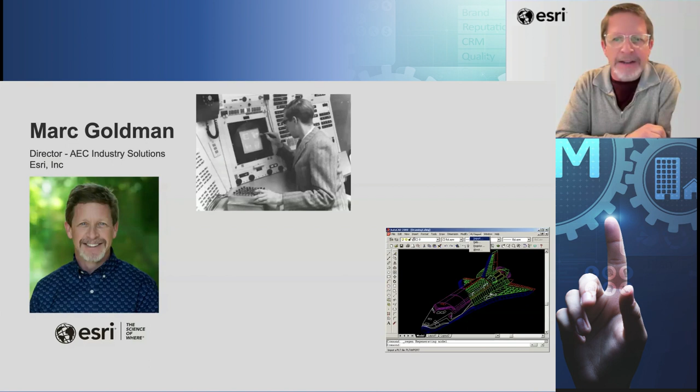I got involved in the world of CAD actually quite a while before that application that just popped up. That was AutoCAD 2000. I got involved in AutoCAD in the late 80s, early 90s. Really didn't touch on GIS until rather recently. I worked at Autodesk twice, once in the days of AutoCAD and once in the era of Revit and many, many applications. And these days, my world involves the intersection of GIS and AEC technology, certainly involving BIM and scheduling content and project management and environmental management types of solutions.

And that image that just popped up is an application called ArcGIS GeoBIM, which I'll show some applications of later, a little bit here just before we jump into all the content.

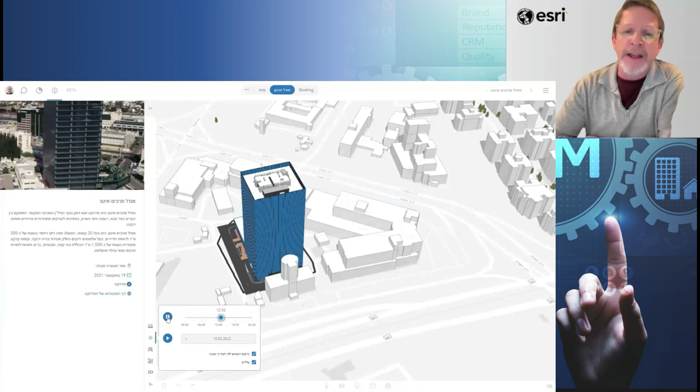This example is one I received from our partners in Israel. Actually, if you're able to read the Hebrew on the right side, let me know. This is a project in Tel Aviv where BIM content got inserted into the GIS view to understand, at various times of day, light studies, shadow studies, and traffic patterns. Once the project actually got built, it then got scanned using drone flights to capture the conditions of the building itself, as well as existing conditions around it through aerial imagery, helping urban planning, urban design, context awareness, visualization, and various other levels of understanding through this combination of 3D BIM and 3D GIS.

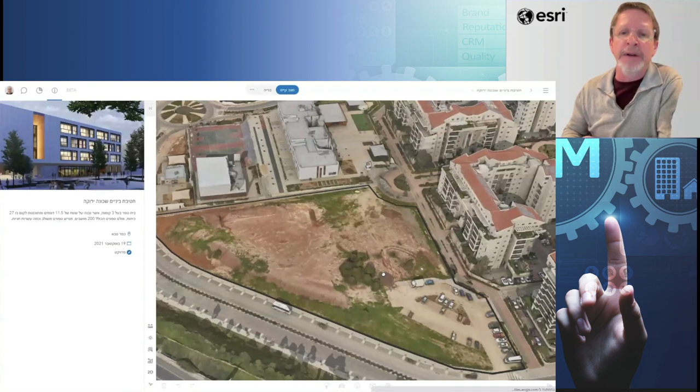In the realm of environmental consulting, GIS is a critical solution, data set, and analysis tool to improve project efficiency and accuracy, to make better decisions as it pertains to the biology, ecology, and sustainability of our built world. This is an interesting project, now a couple years old.

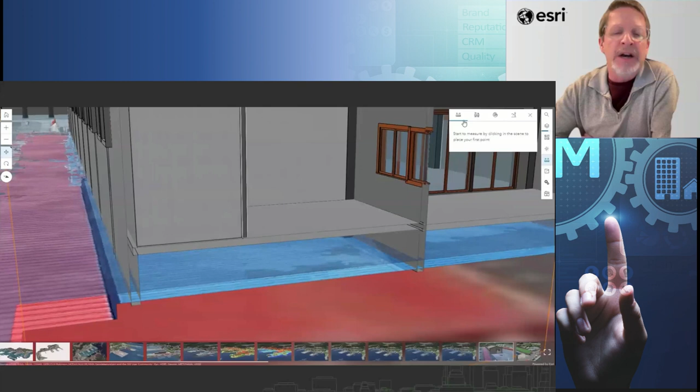We helped our Taiwanese partners schedule and plan a drone flight using some Esri technology. You can see the point cloud of this port environment pop up, some BIM content on the pier itself, and then by changing the sea level rise conditions from 1 meter to 5 meters to 10 meters, we can see what the architectural impact is. So building this building on top of the pier with enough, about 3.5 extra feet, allows for the sea level rise we know is going to occur, and yet this building does not get negatively impacted.

Engineering and consulting in GIS is, in some ways, the bread and butter of Esri over many years, using our tools to provide geospatial context, different layers of data, traffic flow, weather patterns, the location of competition or partners you might want to know about, and the understanding of both above ground and below ground, to improve the decision-making that engineering and consulting firms take on.

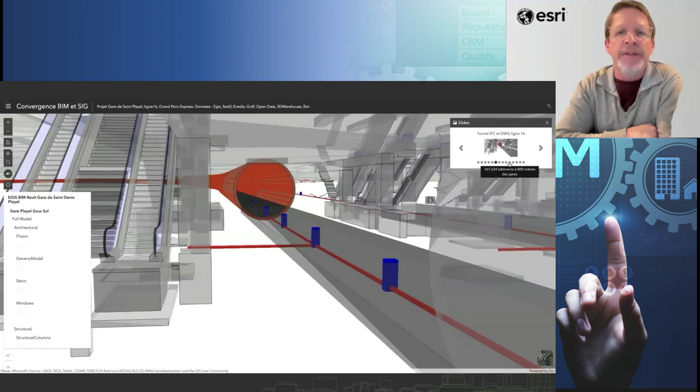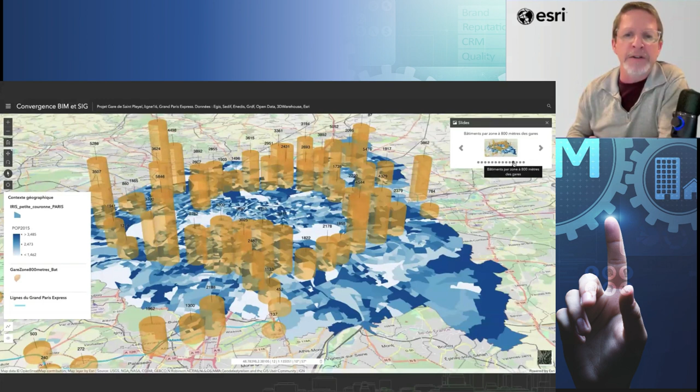Another interesting project, this one in Paris. I believe this was... I forget which firm, it'll come to me in the middle of the night. But they were tasked with defining and identifying the best location for additional metro stations in Paris based on the usage of existing transit. In this case, it was a Revit file dropped into the Parisian fabric at the proper location, based on where the population centers were and how the metro system was used. This combination of 3D BIM and 3D GIS, including demographics information, transit usage, and population density, provided better answers to the engineers who needed to make those kinds of decisions.

And finally, construction management. This is an area that, when I joined Esri, I thought would be sort of the sleeper of the project workflow. Why would you need GIS during construction management? But it turns out it's one of our hottest, richest areas of customer value. When you combine GIS, which is all about location information and context, and not just the where but often the when - GIS is very time-based - when you're able to combine GIS with cost, time, and safety, you're reducing the risks associated with those.

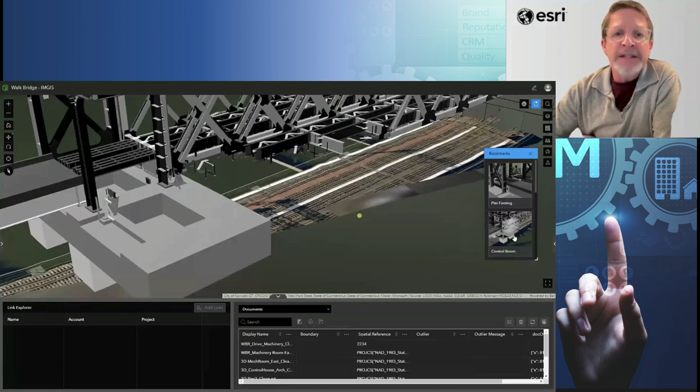And those are sort of the three pillars of construction management: saving time, saving costs, and creating safer environments. So I've got a few examples here that I love to show. This is HNTB replacing this old lift bridge in Norwalk, Connecticut. They brought in a combination of Revit and Bentley content into a GIS environment.

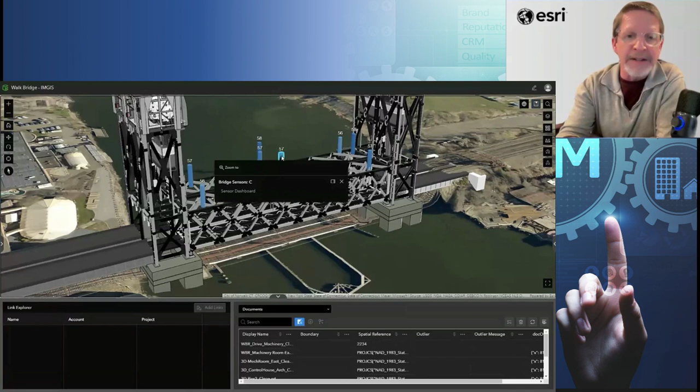And as the pile driving is occurring, the environmental conditions, the seismic activity of the ground itself is being reported in this dashboard view, combining 3D and imagery and IoT sensors, helping the construction team know when to stop the pile driving because they are potentially creating risk of an old asset that still is critical.

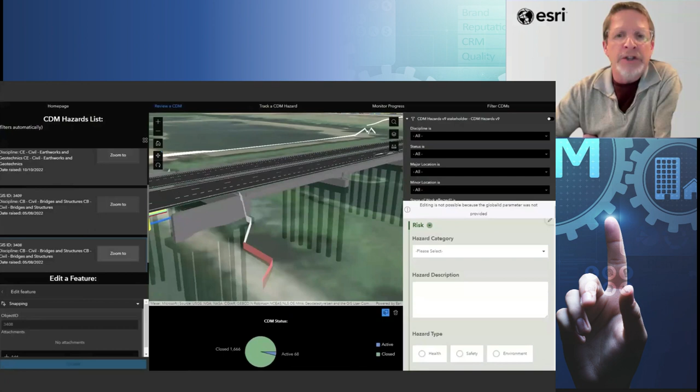Another project, this comes from across the pond. Our friends at Skanska UK infrastructure team built out a mobile app using one of Esri's tools called Survey123 that allows the construction and design teams to collaborate, understand existing conditions in the field. Every one of those little red markers in that map indicates a report that was generated showing where perhaps a safety issue existed or standing water or something underground that needed to be considered.

They go out in the field, they collect the data, they come back in front of the computer in the office or virtually across multiple offices and review these construction design management hazards in this combination of 3D GIS above ground and below ground with field data collection.

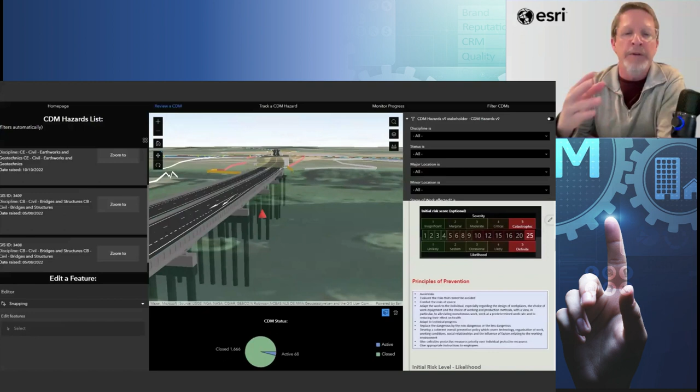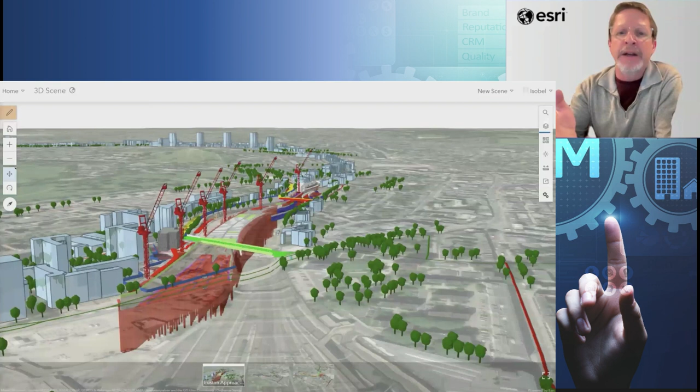Another project from Skanska, also in the UK. This was an interesting project that, again, combined many forms of information. 3D in the form of BIM, 3D in the form of OpenStreetMap data, the actual tree locations placed on a 3D terrain, and then they used this application combined with other apps to understand the progress of construction.

So again, their construction project management team would know the status of piles that were being drilled and eventually placed and then eventually QA'd in this dashboard-like view, rather than doing paper-based statusing or simply having a schedule that was always out of date. They had a real-time view of the status in a way that anyone could understand. You don't need to be a construction project manager capable of reading a work breakdown structure in a CPM-based schedule. This is just a simple dashboard.

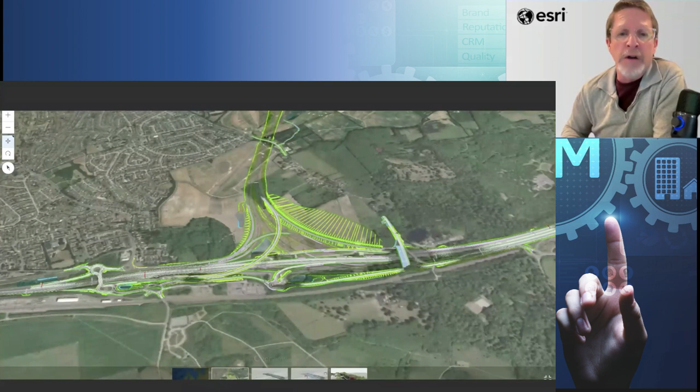And one last one from Skanska, because I think this is really interesting. They bid on a project. They got all the drawings. They modeled them in BIM. They brought them into GIS, put together their proposal, and with about 3 weeks before final decision, they received another bid packet without a clear indication of what the changes were from the initial set of drawings and models to the next one.

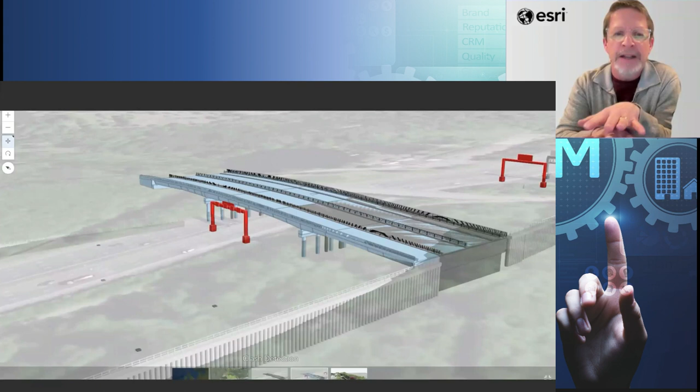They brought it together in GIS, and what you should see pop up on the screen here is these two different overlapping views and these gantries located in new locations. So by means of using GIS and the location-centric approach, they were able to understand the changes between the initial bid packet and the one that they had to submit an estimate on in a matter of 3 weeks. These were point clouds and models and GIS and satellite imagery all brought together.

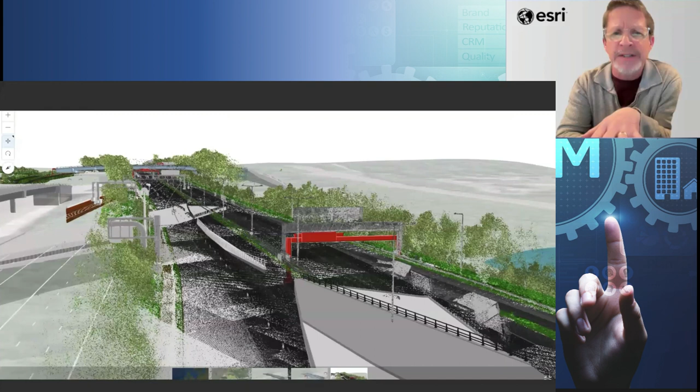And it's one of those success stories where GIS and BIM and all these tech brought together for bid stage led to Skanska winning this project about 6 months ago, and I believe that they're moving forward with construction.

So again, GIS for architecture and urban design provide these great capabilities we talked about. Environmental consulting helps save water, energy, and materials because of location. Around engineering, it's about decision making, improving the planning and engineering processes, and finally, construction management. So many benefits, not enough time to go into all of them right now.

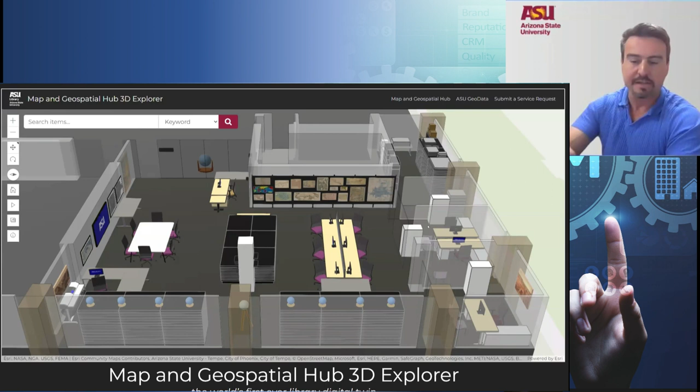So I'm going to transport you all virtually to Tempe, Arizona, a beautiful suburb of the Phoenix metropolitan region, where one of Arizona State University's multiple campuses is located. It's sort of the de facto main campus, Tempe, Arizona here. And this building over here to the right is a section of Hayden Library. And here's another shot of Hayden.

So my unit that I oversee is called the Map and Geospatial Hub, as I just mentioned. And it's really just the traditional map library, as one would expect. We have tens of thousands of physical, analog, hard copy paper maps that we're actively digitizing. So one part traditional map library and another part modern GIS center. And this project here that we call the 3D Explorer really embodies the epitome of that marriage between a traditional library map collection and a modern GIS center.

This is what it looks like when you visit the Map and Geospatial Hub. This is the outside of our suite. We're located here on the 3rd floor of that building, Hayden Library, and this is how we've modeled it with a variety of tools. I'll show you multiple views of our indoor model for our indoor suite, and as we tour more of this indoor space virtually, you'll note that the primary objects that we modeled are really very simple.

They're really these rectangular prisms that are used to represent our flat file map cabinets, which, as I mentioned earlier, store tens of thousands of maps. We used to have approximately 150,000 maps, and partly because of the data that underpins this application, we have done some healthy weeding, as they say in the library world, or de-accessioning of maps. And we currently have about 80,000 physical cartographic resources, including physical historic aerial photos.

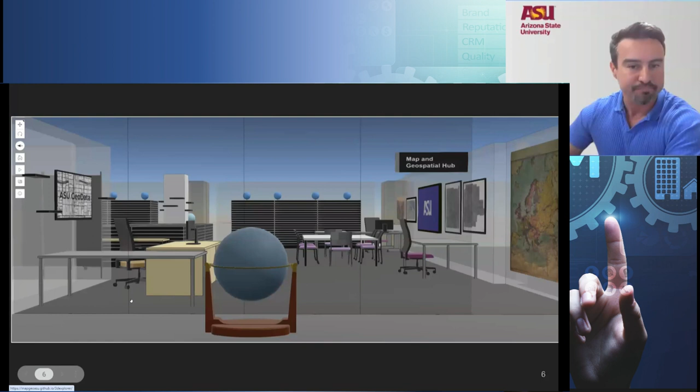So let me show, excuse me, didn't mean to click that. Yeah, that's a hyperlinked image. Sorry about that.

So here, forgive the bad photography. My staff had bad lighting that day, but here's another view of that indoor suite. And here's how we've modeled it again in our Map and Geospatial Hub 3D Explorer application. So as you can see, we've really focused on a lot of the details. We are an academic map library, so a lot of the ambience of our room actually consists of map decor itself. So we wanted to ensure that we textured some of those simple map objects to lend a vicarious feel for what it's like visiting our actual space.

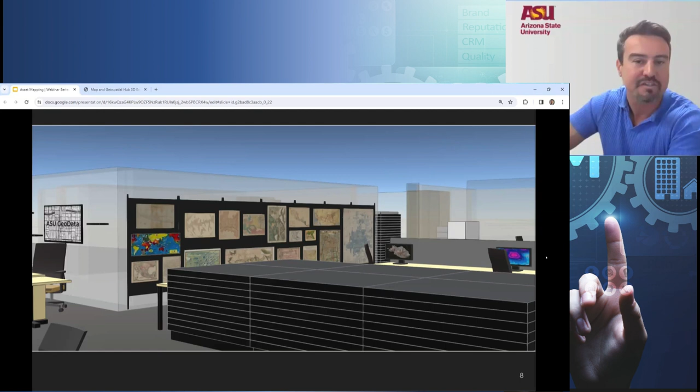Again, forgive the bad lighting. They chose to photograph on a bad day, but you get the gist of what this room actually feels like in the real world. And here's it represented in the 3D model.

So forgive me, I should have had smooth GIFs. I hope this video loads. Live demos are risky, but live videos are also risky. Just wanted to zoom in.

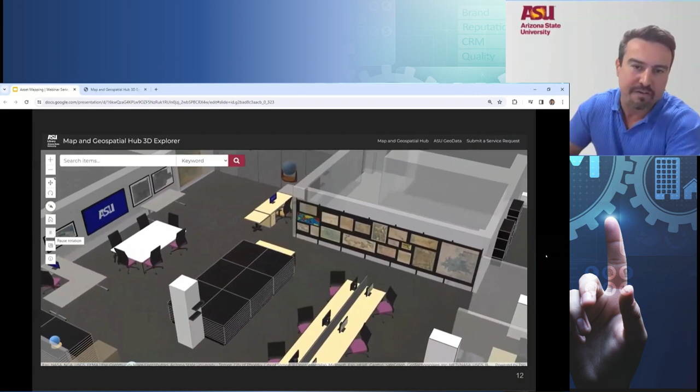So we just flew into this Esri ArcGIS Online 3D map scene, and that showed the interior, or we sort of flew into the room. And I just wanted to give another representation of what this three-dimensional model looks like when you visit. This is a live web application that all of you can visit, and I hope you all do. And forgive me that I chopped up these videos into multiple video sections.

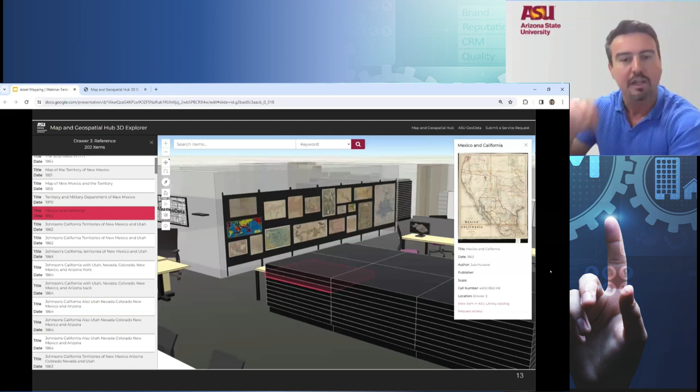But let me tell you, what's the gist? What's the main purpose of this so-called digital twin? Well, first and foremost, it's a resource locator, which, as I'm sure many of you can imagine, even colleagues from the local government sector, just identifying assets and locating assets is important work, right? Especially if you have large asset inventories to manage. And in the library sector, that's the essence of what we do. So the beauty of this is that we have unparalleled locational specificity. We can locate the individual map items down to their individual drawer or shelf locations.

You can also, of course, perform text searches, and obviously with sort of traditional GIS functionality, you can identify all the locations, and the app, when you visit it live, will dynamically highlight all of the locations where the assets that meet your search criteria are located. And if you want to zoom in or identify one or more of those specific assets, like we're doing right now with this aerial photograph, it will show you exactly where it is, and of course provide metadata in the pop-up box.

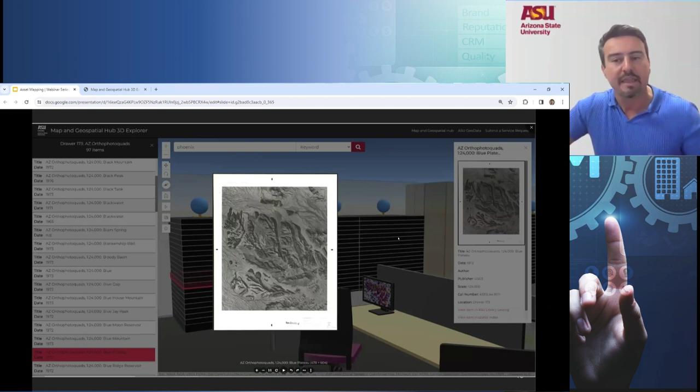The main descriptive information about that asset: our users, which are really higher education library users but also public library users, can get that critical descriptive information about the asset in question.

I'm pleased to report that our entire inventory, as I mentioned earlier, approximately 80,000 cartographic assets, has been fully uploaded, but I regret to report that we haven't digitized everything, right? So, libraries and institutions all over the world are facing this digital transformation challenge, but we are steadily making huge progress. But the goal, of course, is to have all assets fully digitized. So not only can you get the basic text-based descriptive information, but also, which is critical for our patron base, our user base, we want to give people a quick view of what those cartographic assets look like, right? That's critical when you're just browsing for maps.

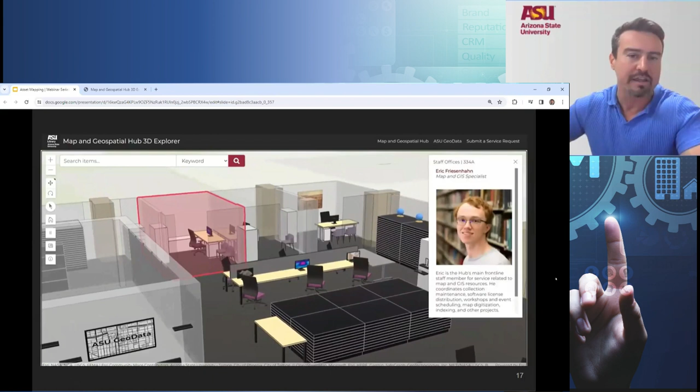Here's another quick video showing off some other functionality. So virtually everything in this three-dimensional model is selectable. So here I'm actually selecting the office location of the gentleman who did most of the mapping for this 3D model. That's my colleague, Eric Friesenhahn, our map and GIS specialist. He did a phenomenal job modeling this with both ArcGIS Pro and SketchUp.

And here we're seeing a really fantastic plugin. It's called the Pannellum plugin, and I'll talk more about the software architecture in a moment. But we added some open source functionality to really beef up the core functionality offered by the ArcGIS 3D web scene.

Forgive the delay on loading this video. I might skip it if it doesn't play. I want to give it a chance to load. I will sheepishly move ahead if it doesn't load in a second. That is embarrassing. Forgive me, friends. Oh, don't freeze entirely.

That video would have shown the exterior view with the 360-degree panorama photo viewer, as we saw in the preceding slide. Let's talk about how this thing works. And I apologize for the cadence of my speech, my friends. There's so much to discuss here, but I'm cramming all of this into a quick 15-minute overview. But let's get into the nuts and bolts here.

And first and foremost, how do you end up at a live, dynamic, feature-rich web application? Well, you first have to assess or produce the data assets, and obviously in the BIM sector and construction management sector, those documents are typically stored as CAD files, computer-aided drafting files, right? So the first mandate is to convert those CAD data into a GIS-compatible format. And we did that.

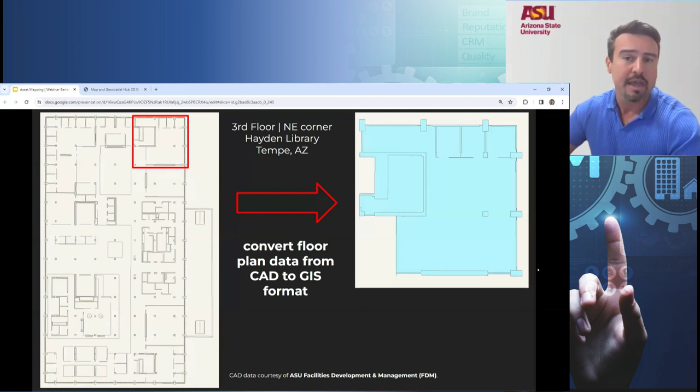Eric Friesenhahn did a phenomenal job working with these CAD data, taking them into a 2D web map, and then through the magic of ArcGIS Pro, loading up a local 3D web scene, extruding those three-dimensional objects. We opted to go with the three-dimensional multipatch feature object, which is a great way of storing these types of geometries. And we produced the basic skeleton, if you will, of the application.

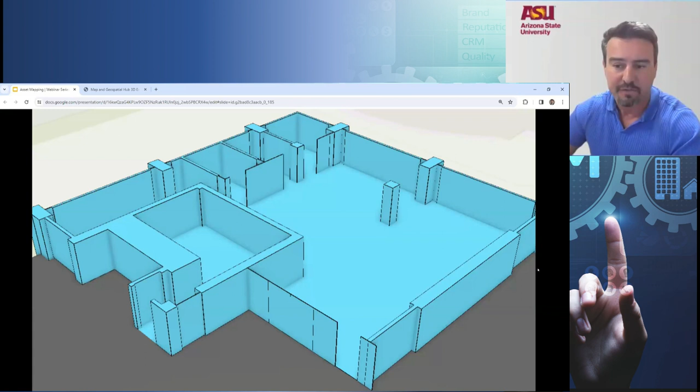I realize I'm already running tight on time, so let's blast through and talk about the software architecture here. This is really the meat and potatoes of this application. So we're extremely proud that we employed a very simple and thus easy to maintain architecture. With these customized applications, one of the biggest issues is the sustainability of the software. Often staff leave, you have one or two core developers, they move on, and then the rest of your team is wondering, how do you maintain this thing? And maybe they're poorly documented, but we're extremely pleased and proud of the fact that the whole application is fully transparent.

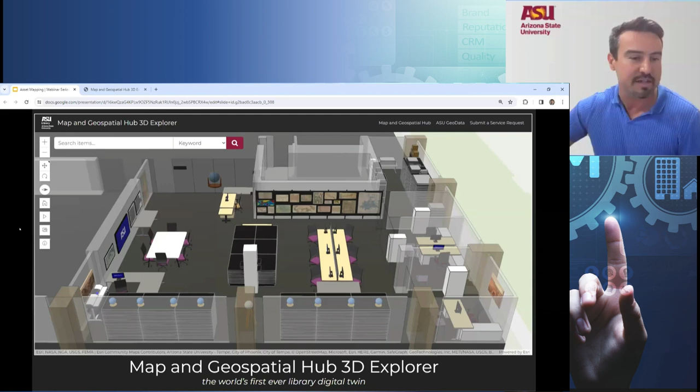Thanks, everybody. Thanks, Matt. I really appreciate that. Give me just one second, I'm going to share my screen. Hopefully this all works.

Okay, hopefully you all can see my screen. I just want to start by thanking everybody that's gone so far and all the attendees that have come to the meeting. It's been absolutely fantastic. Thank you, Keith, Marc, and Matt. Today I'm going to be talking about trustworthy twins, the power of precision. We've been talking about digital twins and BIM data and 3D GIS data.

Let's wrap all that together. We'll talk a little bit about Bad Elf. But before we start, I want to run our second poll for the day. There should be a poll that pops up on your screen any moment. There it is.

It's just a couple quick questions about geospatial solutions, if you wouldn't mind. One, we'd like to know if your organization is interested in implementing any type of geospatial solution, specifically speaking to what we're chatting about today. We're also interested, if you are looking for geospatial solutions, what kind of time frame are you looking at—something in the near term, or something in the next few years? And last but not least, we'd like to know where you're going to implement the geospatial solution: internally, externally, or maybe you're not trying to implement, or maybe you already have all these geospatial solutions and you're beyond this. So if you wouldn't mind, go ahead and take a couple seconds here and answer that.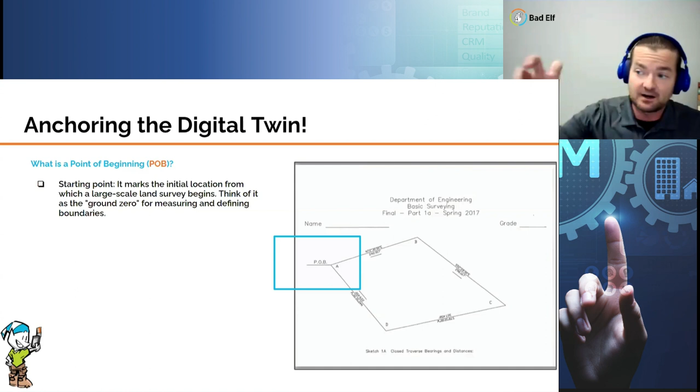It's the piece that every other part of it kind of connects into, and it raises the question that we need to have high accuracy data collection so that we can place these things like BIM data or 3D data correctly. So it's the starting point, marks the initial location from which all land surveys and geospatial projects start from. It's the ground zero of measuring and defining boundaries. For Matt, the POB in some aspect was kind of that building parcel data, that CAD data that he showed. It has historical significance, by the way.

Point of beginnings have been happening for a long time. In fact, I've got an example here where the U.S. Public Land Survey, established in 1785, started a point that famously set all of the mapping in order for the U.S. Well, fun fact, you can go back 2,000 years to the Roman Empire, and there was literally a pillar in Rome that was the point of beginning that all maps and all travel and all geodesy from Rome was calculated from.

So all the marking, documentation - this point is usually a monument. It's some type of, back in the day, it might've been a rock cairn, it could have been a fence post, now it's usually a rebar stake, whatever the case may be. This is how the data are set up. Without it, your data can be out of place, and the worst thing for three-dimensional data is it not being in the right location.

We're going to look at that in a second. I just want to say it's important for all boundaries, surveys, GIS data, BIM - it's the reference point for all subsequent measurements. If you start to understand the relationships of space and how things interact, if that initial calculation is off, the rest of your data are garbage, okay?

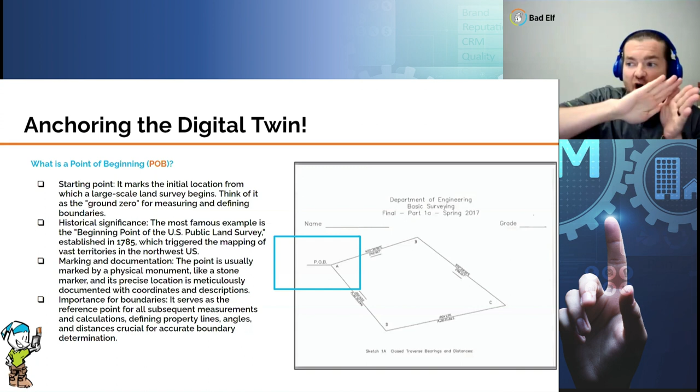You can literally mess up this very first point, this point of beginning, pun intended, and all data downstream can be influenced and impacted. There are two terms when we talk about accuracy: absolute accuracy, which is how accurate you are to the actual known location on the ground, and precision, which is how accurate you are within the data set. How repeatable is it? Is the measurement along the roadway actually the distance, and is that roadway actually in the right place? These are different but similar concepts.

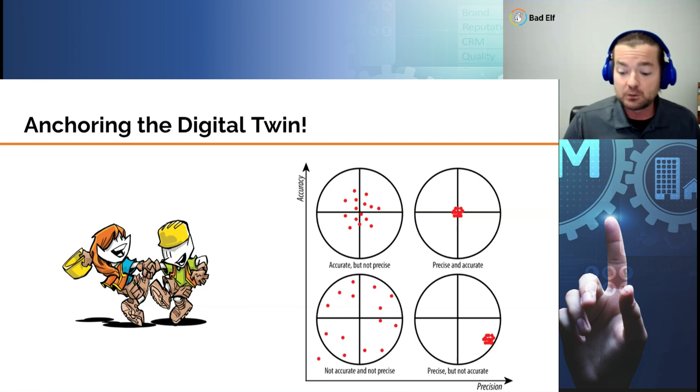If you don't understand this, please ask questions. We can talk about it more in the panel because I'm running out of time, or follow up with me. We can talk about why accuracy and precision is important.

When we think about Bad Elf, you may conceptually think of like a cul-de-sac in your neighborhood. When we start talking about a point of beginning, you're really in that one centimeter. You're at a very, very finite location that is only very specifically in one location. You want to build that data from there.

In fact, the digital twin is so important that there are actually ASCE standards. The American Society of Civil Engineering has several SUE standards, so subsurface utility engineering. We could talk about that later - we're going to have upcoming Connect Me webinars on more about SUE. Not a boy named Sue, that's a great Johnny Cash song, but this is actually underground utilities.

If you do projects in the state of California, the state of Colorado, different municipalities across the United States or even the globe, they are requiring you to have high accuracy data models now. You can't just start putting things in the ground.

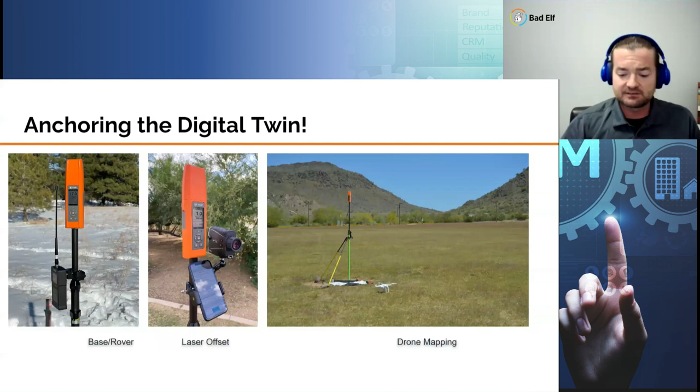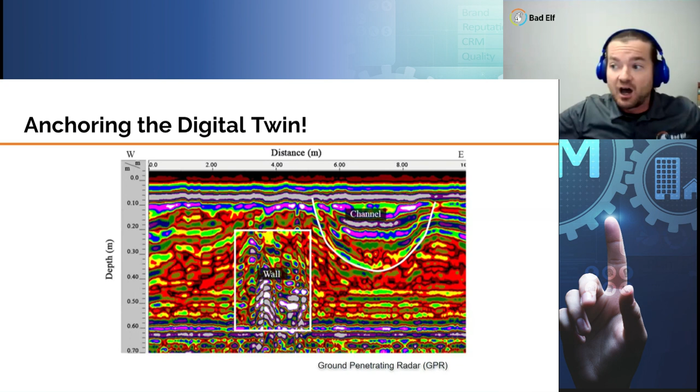Any type of data, base and rover, laser offset, drones, any of these things, whether it's Bad Elf related or not. Perhaps it's ground penetrating radar and you're looking for burial sites for Civil War monuments, and so you're actually creating penetrating stuff to see under the ground. If you're looking under the ground and you don't know where it is in relation to things on the ground, you're lost - you've already missed the point. That's another pun intended.

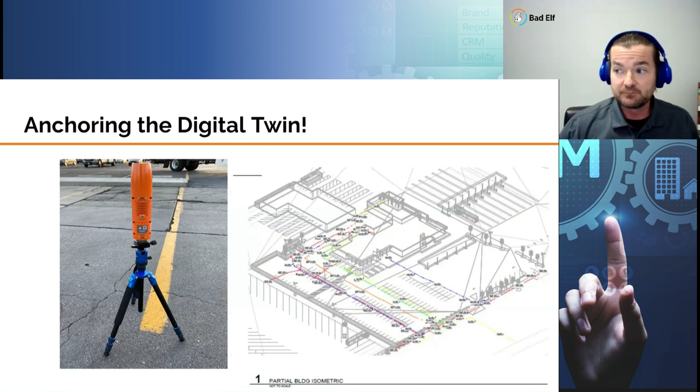Or perhaps you're riding around and you need to know where these utilities are located because you're retrofitting stuff for the community. This is important. Perhaps you're actually laying out parking lot lines or other types of infrastructure for actual building information models - again, this is tying the building into the ground.

So how do we get there? I mentioned earlier, Bad Elf's got this great geospatial enablement team. We have several people on staff that you can leverage for your needs. We can come alongside your organization beyond just providing hardware, but actually help with the support, the training, the implementation, and so we can help get you to where you need to go. We have different types of packages, we utilize different types of solutions, Esri being one of them, but we have a plethora of others.

I just want to leave you with this little joke here. The Bad Elf on the left is the real world, and the Bad Elf on the right is the digital Tron sort of pixelated image - so it's the digital twin. XYZ, the lat, the long, and the elevation marks that spot. If you put CRUD into the system spatially, CRUD will come out of the system. No one will use it, and your project will be lost. So you've always got to start with a good point of beginning.

I don't care if it's with Bad Elf or some other geospatial device. Make sure you are starting your project off on the right foot. The digital twin begs you.

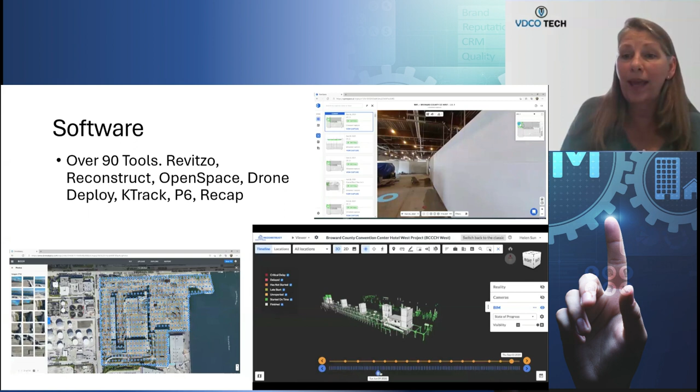As a practitioner, we deal with all different kinds of software. So when you ask us as an owner to do BIM to GIS, sure, we can do it. An architect, a contractor across the chain will say that we can do it too, because really it's just another tool, another app, another plugin that we need to look at to see how we're going to get from point A to point B. And as architects, Marc said it, we think everything is spatial. We've been working in the spatial industry, location.

Clash detection and coordination is really where the BIM meets the road, right? It's spatial coordination, clash detection. This is something that we need to make sure that what was being modeled on the design side is what was being constructed in the field. The contractors are using this for coordination to save them money and change orders, and we're documenting this along the way.

This is what it looks like in the real world. As an owner compliance agent for Broward County on their digital deliverables, we take real world conditions, we overlay them with photogrammetry, with laser scans.

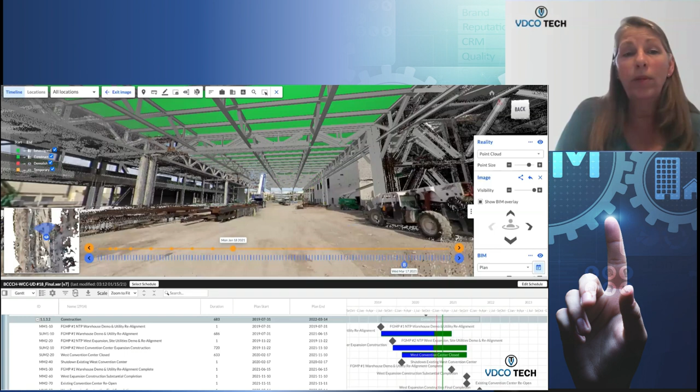We want to make sure we understand the level of accuracy. We actually specify USIBD's LOA as a standard in our contracts. We then tie it into schedule because we want to manage critical path, overlaying the model so that you can get that visualization. That's what we're used to doing as architects, engineers, and contractors.

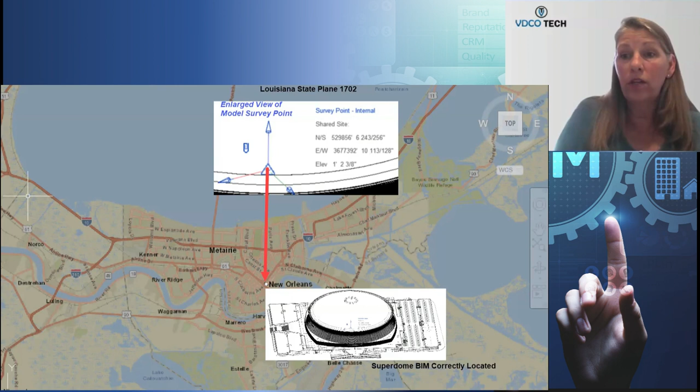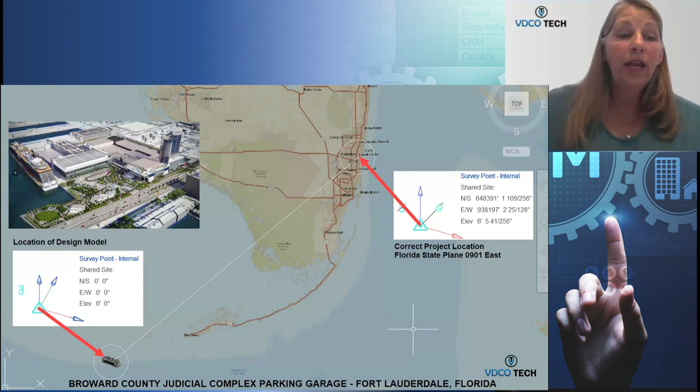So now let's look. We talked a lot about where it should be located, but that's not intrinsic to us as design professionals. This is a project that VDCO Tech has been working on, the Superdome. You look at the survey point, you look at where it is in the map, very simple. It's in the right location. That's a win. But you look at our other projects: Broward County Judicial Complex Parking Garage should be, you see the survey coordinates there, near Fort Lauderdale, and it's actually closer to Cuba because there it sits out in the ocean.

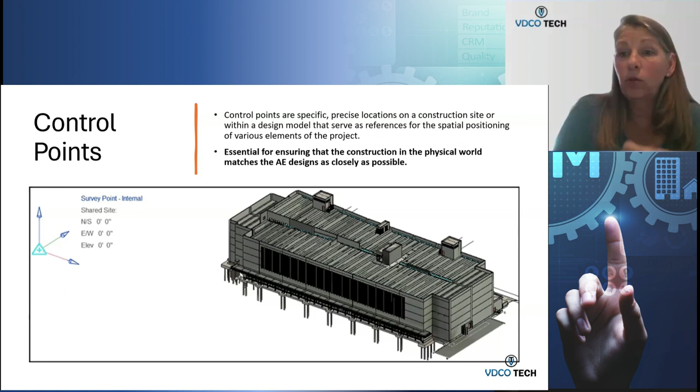And the reason for that is the origin point for architects is typically 0,0,0. That's the control point to make sure that as an architect, all of our subcontractors and consultants, all their drawings and models are coming in and aligning to us. We then, as architects, move forward to the contractor to make sure that the physical world can build what we have designed. That's what we know and understand of spatial coordination. That control point 0,0,0 is typical.

I ran an architecture company for over 14 years. In doing so, a lot of times we didn't have the survey point right off the bat. We knew the size and location we could do. We start designing and design development. We know that those real world coordinates can be put in later. Also, 0,0,0 simplified our math. So when you're looking at that X, Y, Z coordinate, why our models don't always align in that geospatial world is because we're using that 0,0,0 coordinate. That is the reality of what it is.

The accuracy that we're actually concerned about when we're in the design and construction phase and building your capital projects is making sure that what I model can actually be constructed. It's the contractor's responsibility to site it. The measurements, the verification, and the accuracy in our models, our complex designs: we need to make sure that we're not designing something with such incredibly tight tolerances that it can't be built. And then we need to look at the environmental factors. Is it a hot climate, a cold climate? What's the expansion and contraction happening in the materials that we're selecting? Again, to make sure that what we're doing can be built.

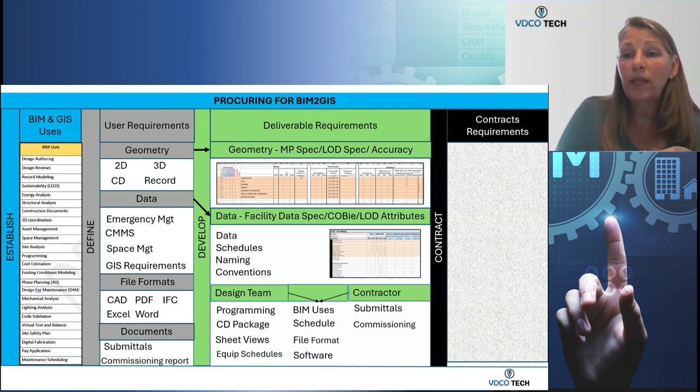If you are an owner in a government agency like Broward County and you're looking to go from BIM to GIS, you have to procure for it. You need to look at where your BIM and your GIS use cases are, where they match. Then you define it by your geometry, your data, your file formats, and ultimately the documents that you need. That will help you develop strategically your model progression schedules, your facility data specifications, and who is responsible: the design team, the contractor. Ultimately it ties in through your BIM uses, where they have crossover and who is responsible, and then contract for it.

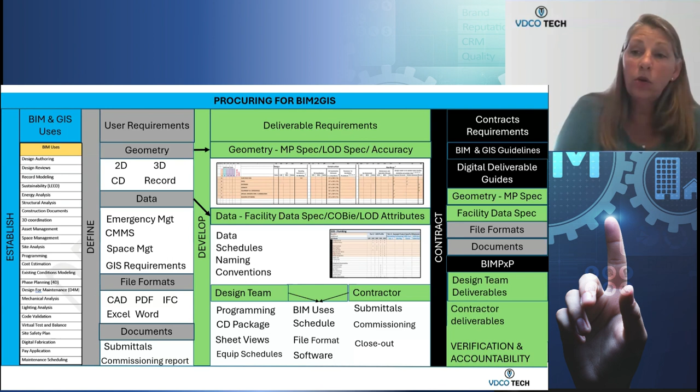Your BIM GIS guidelines, your crosswalks, your file formats, and that BIM execution plan isn't just something that you say, it's actually how you can hold your design and construction teams accountable. You need to verify that what they've said they've actually done, and you can hold pay apps, which is what we do with a lot of owners to make sure you're getting the final end result. The end result from an architect, engineer, and contractor is complete and accurate as-builts. We want critical systems that are modeled: geometry, data, files, you name it. And if you want it to go to GIS, you have to specify the location so that we can put it in properly, so our models aren't coming out in the Atlantic or Pacific Ocean.

When we're working with our owners, we want you to say, do you want to do it how it is today, traditionally? Do you want to look at open standards? How far in those open standards do you want to go? And do you want to look into artificial intelligence? Then you look at the methods of the data exchange that you're going to require, where the interoperability needs to lie, who needs to collaborate and how, and then what that technical experience is.

We're in a labor shortage in our industry and not everybody has this experience. And you weigh the pros and the cons. And then you look at the challenges, whichever method you pick, to the benefits. So traditionally right now, if we're not siting our buildings at the beginning and using 000, somebody at the end needs to do that because it's not an easy button that then just goes into a GIS system.

And there's a lot of things that are happening with artificial intelligence. Esri, Autodesk, Trimble, Bentley, these guys are leading the field in applying artificial intelligence and language models and computer vision into their software and tools. But there's also a lot of little guys out there that are doing the same. And I encourage you to look into that and to stay aware of what's happening in the industry, because artificial intelligence is going to help us with our labor shortage and our lack of maybe technical experience and knowledge that we have in going from BIM to GIS.

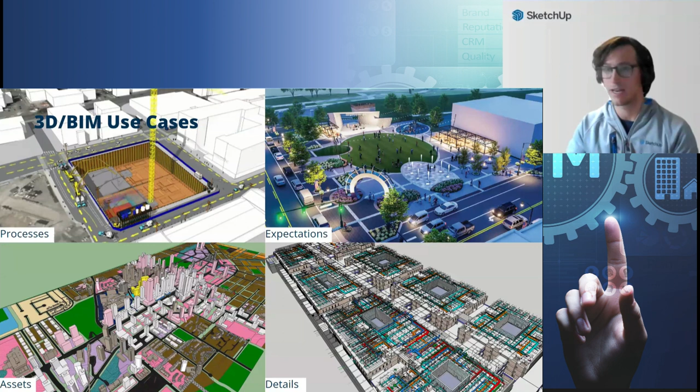Everyone can understand it. It could be great as an internal guide that drives the development of our cities or manages the complex systems of our assets. So we have customers that have 3D environments to ensure that when new developments are coming, they're not adversely affecting anything else. And it's not a very complicated model. It's a simple massing model, but really, really powerful and easy to understand, easy to create, and easy to maintain. And then you can get into that really intense level of BIM, which is every single pipe, every single bracket, everything that needs to combine together in these complex buildings that we've got here on the lower right.

So as I'm sure many of you are aware, the built environment in the AEC industry has a lot of old ways of doing things, hand drafting, archival data sets, and a variety of different ways to capture, store, and share that data. It's often a challenge to combine all of this data into something that's actually useful. So having 10 data sets that only 10 people can work on, that have to be in 10 different pieces of software, leaves a lot of room for misinterpretation and project complications. 3D modeling is often used as the connector of this data. And it may not always be the total solution, but the ease in understanding the imagery will lead to a better overall deliverable in the project.

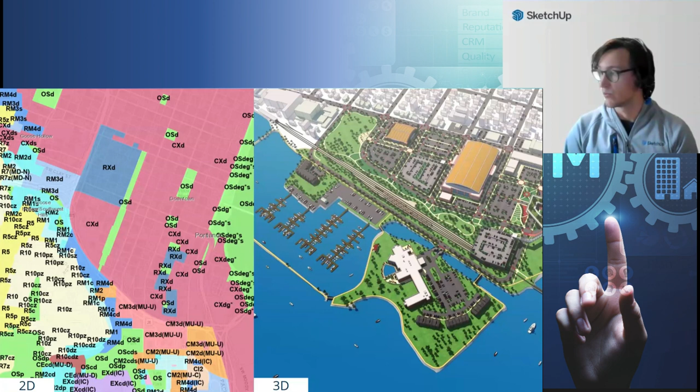So obviously we've got a zoning sort of diagram here on the left that is currently being used by the city of Portland. There's a lot of detail in there, but seeing something on the right is a lot more exciting and a lot more engaging for myself to fully understand what's going on in a new development. And then of course, 3D is dynamic. It's much more engaging and it's appealing to the masses. You don't need to be an expert to understand what's going on in 3D.

Successful projects are a result of streamlined collaboration with the project team and the client. The client needs to understand that the architect or the designer is actually listening to them and producing something that they've asked for. So in addition to that, technology has given us a lot in the ability to share the model in more interesting ways, like this animation of a complex city. Videos, the cloud, augmented and virtual reality offer endless possibilities on how we can approach and deliver and engage with customers or residents.

And visualization is great because it can help interpret project parameters, zoning, building regulations, and more. All of this is part of that BIM workflow, that discovery sort of workflow. And translating rules and regulations into 3D can expedite the design review process and result in more streamlined projects. Including neighboring buildings, recognizable landmarks, and infrastructure can help the public better understand the placement of new projects and how it's going to impact their experience in a city.

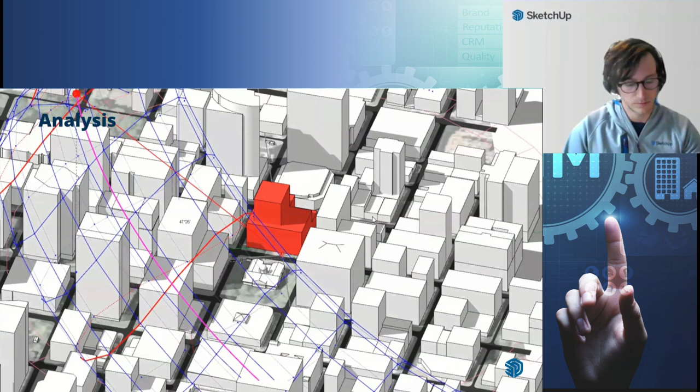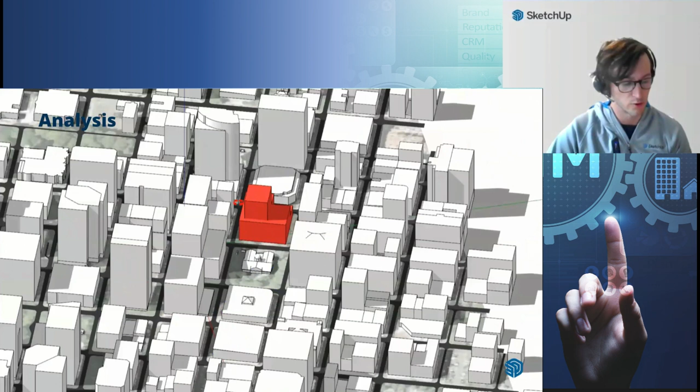3D can also allow you to better understand critical analysis for your project. So understanding how a project is affecting your neighboring environments is super important for successful and vibrant developments. In my experience, I've worked a lot with civic buildings and city halls and taxpayer-funded projects, and it's really, really important that we're not building something with a negative impact. We don't want to build a new city hall next to a great park that holds the farmers market, only for that city hall to block the sun for half of the year.

I live in Oregon. Our sun is critical. If you're blocking our sun and our warmth in those days where it's not raining, we're going to have a problem with that taxpayer-funded project.

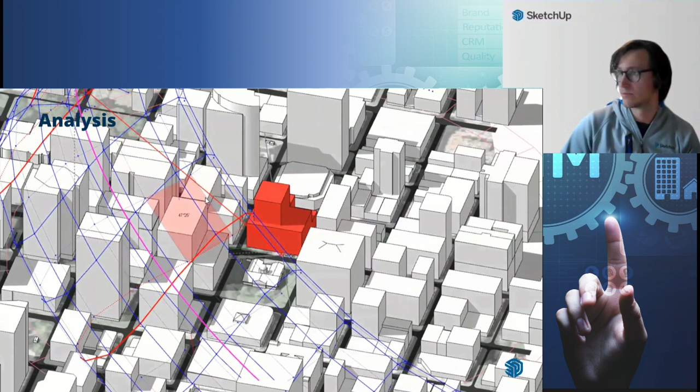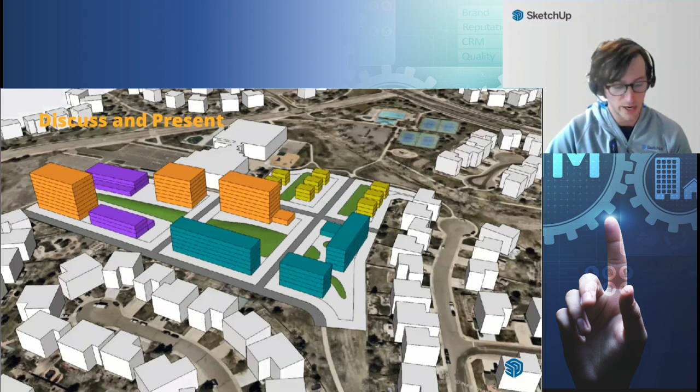One of the great parts about 3D is that it allows you to engage with the public a lot more easily. Providing simple but powerful visualization is a great way to receive feedback from anyone in your community. Not everyone affected by a project is a spatial expert. They're not all architects, they're not all GIS specialists, but they have important questions, and those questions could help your project be more successful.

Their opinion is just as valuable as anyone else's that will be using these assets or living next to them. We want to be stewards to the built environment, and transparency is a really big part of that. So simply just seeing two different alternatives for a really big development, especially if it's close to a residential area, allows a lot of valuable feedback to come in.

And one of the better technical advantages of 3D modeling is the ability to problem solve. Discovering issues before projects have broken ground can keep your project on budget and schedule on track. This is a lot more of that BIM aspect where we do have those specialists and those collaborators coming in, but the imagery that we produce can be really creative and really cool to understand.

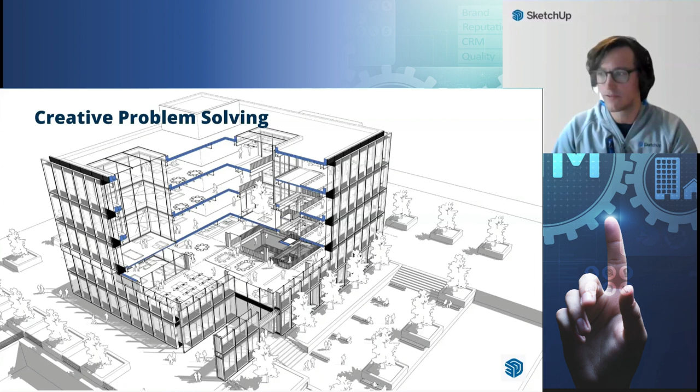So exploding axonometric views, putting in site and vegetation, scale figures, all of that helps us much better understand the scale and the scope of the project, and have some really important conversations about, if we got a little wiggle room over here, can we make a cooler feature over here? But all of this needs to be done in an easy to digest manner so we can ask the right questions.

And it's also really good when we can get an understanding of existing assets, especially in O&M, operations and maintenance. We're going to be doing a lot of upgrades. The goal is to have a building or a piece of infrastructure be built and not have to do a lot of work on it. But things change, quality changes. We want to provide upgrades as easy, as fast, and as cost effective as possible.

And again, with those complex systems and integrations, it's important to have this 3D asset be easily understood, and have it be one data set to actually provide value and continue to be engaging and be able to be updated. If we are delivering some sort of BIM deliverable, but those folks that are in a building or managing this don't have the specialization or the training to continue to upgrade those models, they are no longer useful anymore, and we're not going to upgrade them.

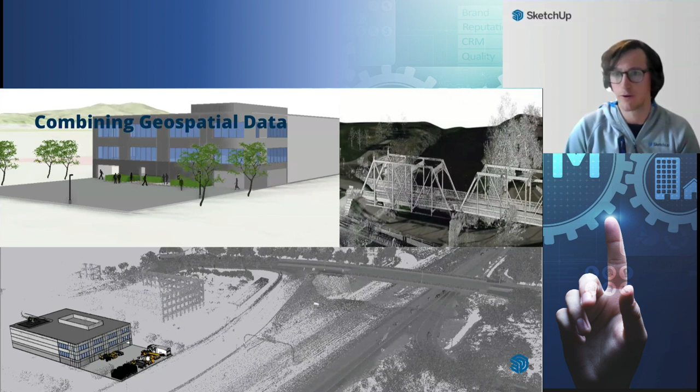But adding all of this stuff together allows us to quickly interpret this, to ask the right questions, to continue to manage it, and also deliver it to anyone who has the ability to understand this. It's really taking the specialist need out of getting value from 3D visualizations.

I'll talk about this just really briefly: what's coming next for visualization. AI is coming, AI is here. But I don't think it's coming for our jobs. It's coming to help us produce better, more interesting data sets.

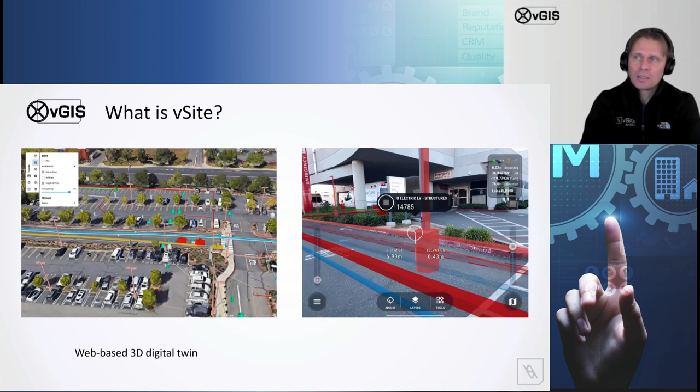That vSite component, which is web-based, is designed to work together with our engineering-grade augmented reality that you can utilize from the ground level to see your construction site when you are on site.

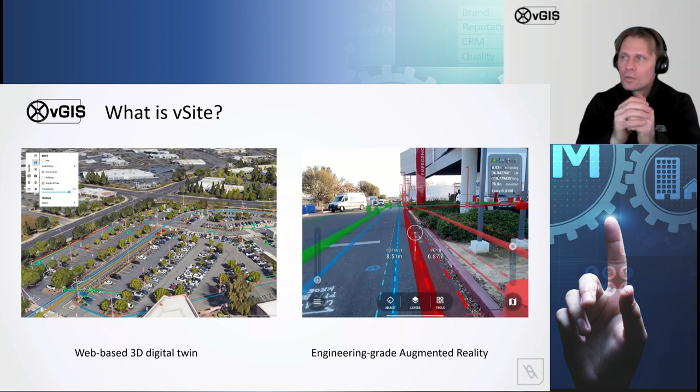Going to the AR component first, because it's easier to understand and get it out of the way, then we can see how it works together with the digital twin. Originally, it was designed specifically for utilities management.

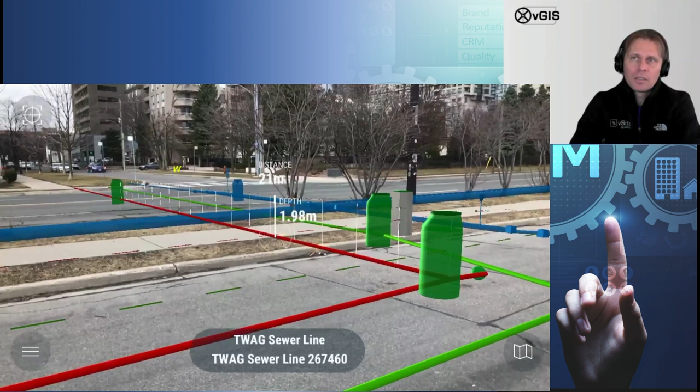Esri was our first integration, and in that space we can draw data dynamically from your GIS database, which allows us to deal with things such as frequent GIS updates, because our system will update itself automatically. Also, it will generate the model that you see on the screen from the attributes in your Esri ArcGIS, so that you don't have to build a 3-dimensional model yourself.

It also allows us to work with data sets of massive sizes that can cover entire countries. So on the GIS side, it's a very powerful solution.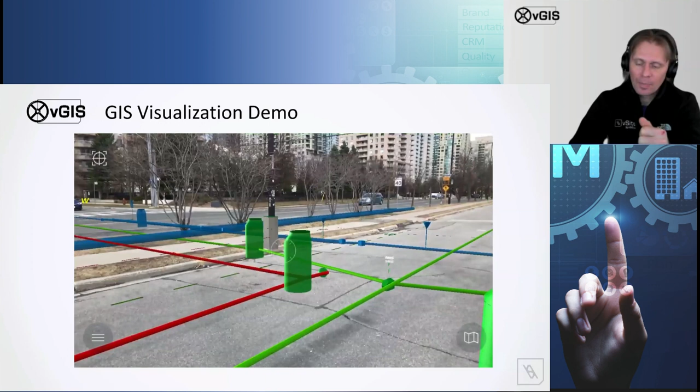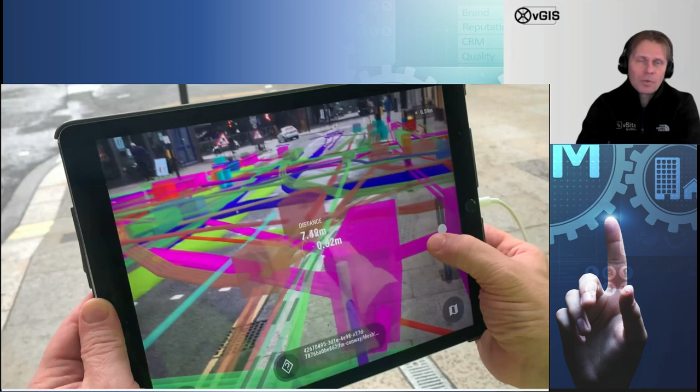Later, though, we started dealing with more AEC information. Subsurface utilities is one of the key components of the system right now, as we can take BIM models produced in Civil 3D or scene services and display it with high accuracy in the field as well. That helps you with planning, excavation, utility locates, and a variety of other tasks to streamline the workflows.

As quite a bit of activities happened not just below the ground, but at the ground level, we brought different surface models into the view.

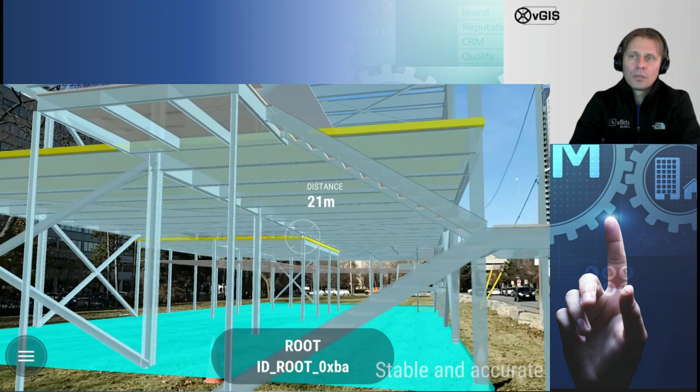In this example, we worked with a surface model that was scanned and compared it to the pink design profile in augmented reality, so you can instantly see where you have to cut and fill. Building on that concept of BIM and 3D, we can display data from scene services, Autodesk Construction Cloud, and other repositories, as well as common software such as Revit and Navisworks, to show centimeter-level accurate information in the field, both indoors and outdoors. Although buildings come to mind first, the most useful cases among our customers are roads, railroads, and utilities.

This is an example where augmented reality is used to review regrading and redesign of a particular road. Another great use of augmented reality is bringing reality capture into the view. Point cloud reality capture is widespread right now, and we can take previous excavations and display them as 3D meshes with up to centimeter-level accuracy in the field. That allows you to peel the layers of the ground even after the trench is filled, and see how a particular asset looked in real life.

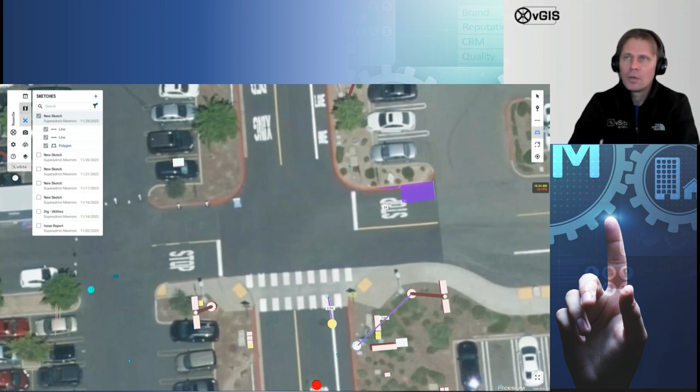Digital twin can also be used for personal planning or for general understanding of the job site. So when you're sitting in a truck and the weather isn't great, you can understand what you need to do and where, just on your tablet with digital twin. Once you step out, you can peel off the layers from the ground and see through it to understand where utilities are. And on the same tablet, you can switch to augmented reality to see everything at ground level with centimeter-level accuracy.

An interesting observation is that most of our customers start using digital twin—probably 9 times out of 10, they deploy and use digital twin first. However, the augmented reality component has very specific use cases. In this example, you can see the pipe was installed approximately 3 feet to the left of where the model says it should be. Augmented reality is ideal for identifying, documenting, and reporting such discrepancies.

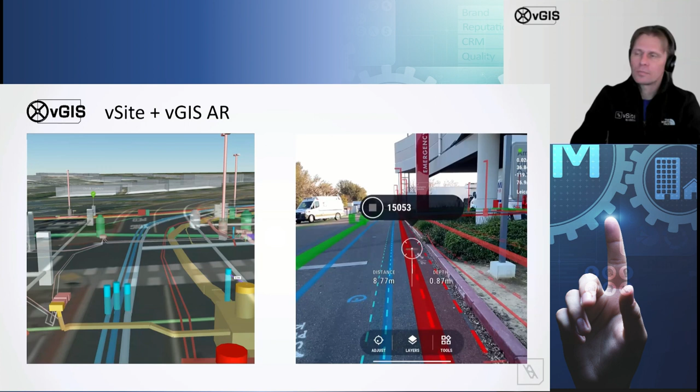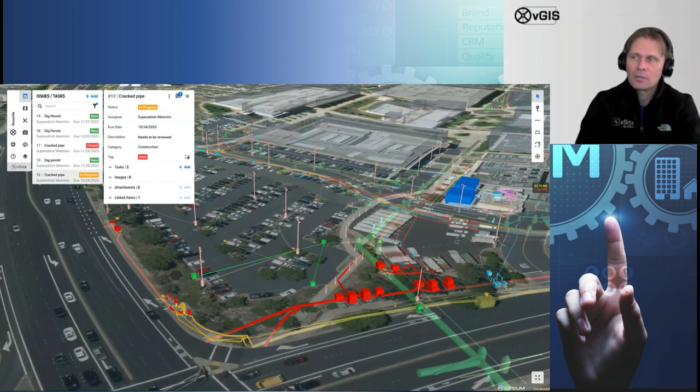Issue tracking or task tracking is another great use of combining digital twin and augmented reality. Typically, when you track an issue, it explains what you need to do. In our case, it also links it to the location—location is a big component of everything we've discussed today. The issue or task is linked to location, so the system will take you to the exact location where the task needs to be performed.

When you switch to AR on site, it will guide you to the exact location. Those yellow tags you see hovering in the air will guide you to where the issue or task needs to be done.

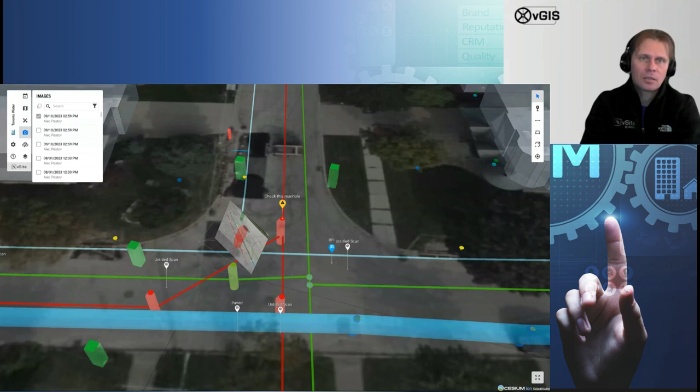We've been working to make sure visuals aren't just for consuming information but can also generate information and complete workflows through augmented reality. For example, once you get to the issue location, you can take a couple of pictures by simply tapping on the screen in the application, and those images show up in our digital twin instantly as oriented images. The oriented image won't just show you the issue—in this case, a misaligned manhole—but will also preserve the angle of the screen when you took the picture, so you can clearly see where the issue occurs. The concept of oriented images is compliant with standards set by Esri, and we're building interfaces for several customers to make Esri a permanent storage for such information in Esri ArcGIS databases.

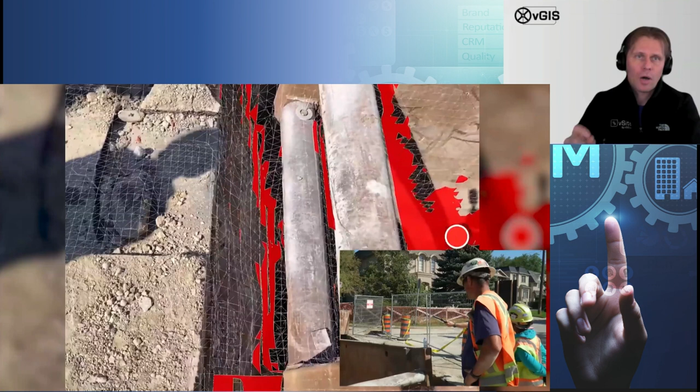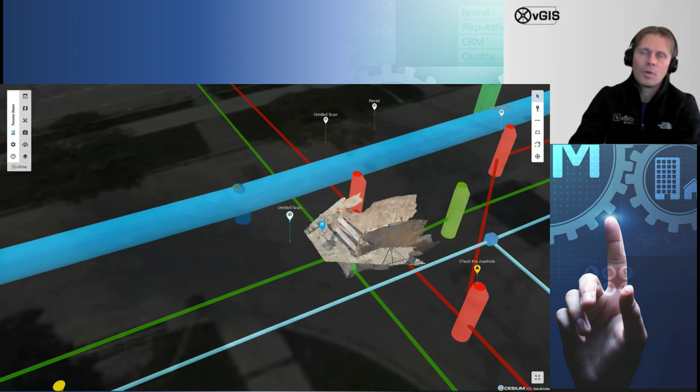Another huge component of the system is the ability to capture reality. You can use just your iPhone or iPad with Bad Elf GNSS attached for accuracy, and the system generates a mesh in real time so you can see what you're scanning as you scan it. Unlike photogrammetry processors that take hours to process the mesh, you can see results within seconds or minutes on your iPad, as it's processed directly and locally. Once you're ready, you click publish, and 30 seconds later that scan appears in the digital twin, so you can compare it to your GIS or BIM records, identify discrepancies, and understand how the project is developing.

And of course, any scan that you do with vGIS is available in AR later on, so that you can use it as the reference as you move around the job site.

It's a very efficient way of capturing information before and after. For example, in this case, we scanned the trench before it was filled and after, and now you can easily identify all the discrepancies and changes between the two states of the trench.

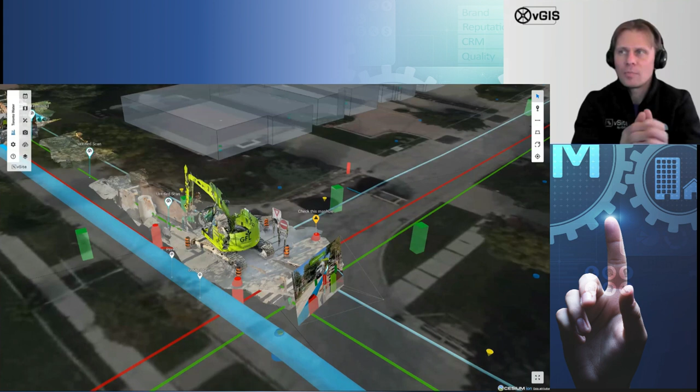What owners and operators greatly appreciate about that approach is that it gives you a very detailed archive of a project, be that a relatively small project such as water main replacement or something on a larger scale.

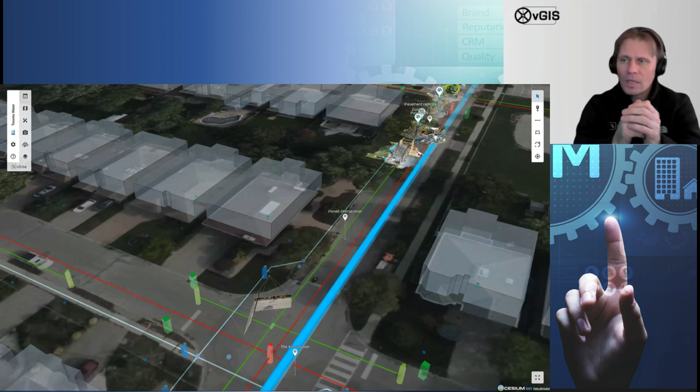You can monitor your job site almost in real time. You don't need a lot of equipment. You can use an iPad paired with Bad Elf and get awareness about what's happening on site, which is appreciated by quite a few utilities. And also, you receive accurate records that you can use for subsequent projects later on.

The final component that I want to present is data collection. Data collection and data acquisition is a very important part of the system. And we have AR-based data collection, which is comparable to survey grade, except it's much faster and easier to use.

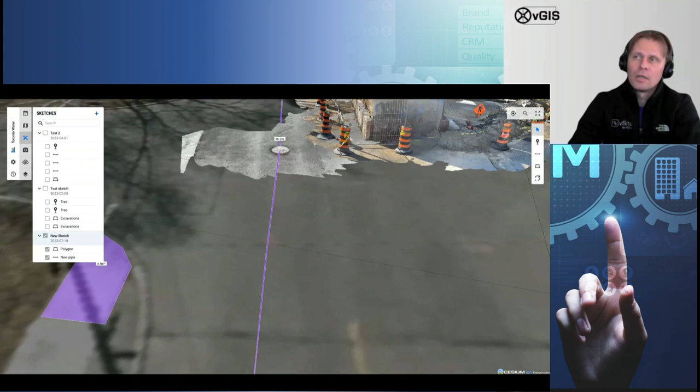Quite a few companies right now are using that as the main method of data collection for linear assets, especially since any data that you collect goes directly into your ArcGIS, can be done in real time or available through the backend, where you can review and validate the accuracy in the digital twin almost immediately.